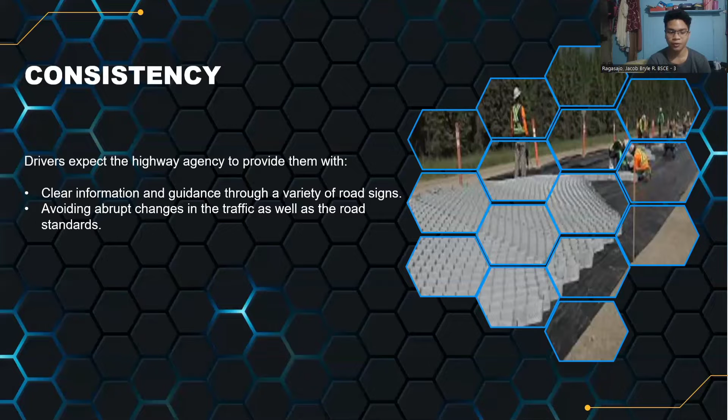AASHTO, or the American Association of State Highway and Transportation Officials. In 1914, the American Association of State Highway Officials, or AASHO, was established as an association of state, territorial, and District of Columbia Highway Departments and the Federal Highway Administration.

The name was expanded in 1973 when the Department of Transportation was integrated into the association, renaming AASHO to AASHTO, giving the officials of this agency the power to govern its operation.

Engineering activities were implemented by standing committees with the task of preparing specifications, manuals, and standards representing current highway engineering practice. AASHTO publications include transportation materials specifications and tests, specifications for highway bridges, geometric design standards, and numerous policy statements and guides.

AASHTO publications are authoritative, meaning they are reliable. So all the information that AASHTO publishes is accurate or true. References are made in these books and periodic manuals. The association also publishes AASHTO quarterly reports on current highway and transportation subjects, including trends, forecasts, and legislation.

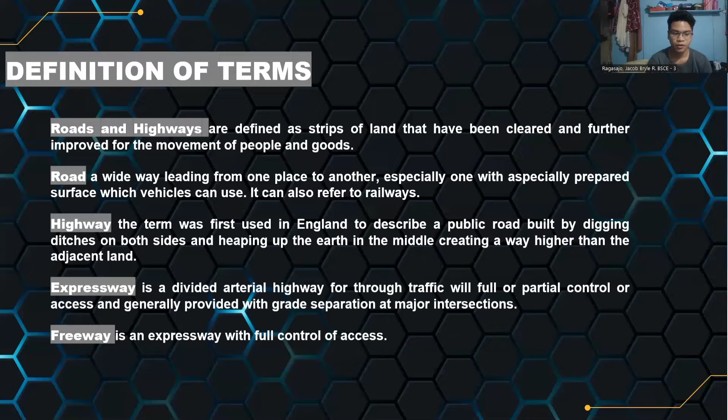Expressway is a divided arterial highway for through traffic with full or partial control of access, and is generally provided with grade separation at major intersections. Freeway is an expressway with full control of access.

Control of access is a condition where the rights of owners or occupants of adjoining land, or other persons' access to light, air, or view in connection with the highway, are fully or partially controlled by public authority. A controlled access highway is a highway designed to allow traffic to safely travel at a fast speed.

There are two types of control of access: full and partial. Both have the authority to control access and give preference to through traffic by providing access connections to selected public roads. The only difference is that crossing at grade or direct private driveway connection is not permitted in full control of access, while in partial control of access, crossing at grade and private driveway connections are allowed.

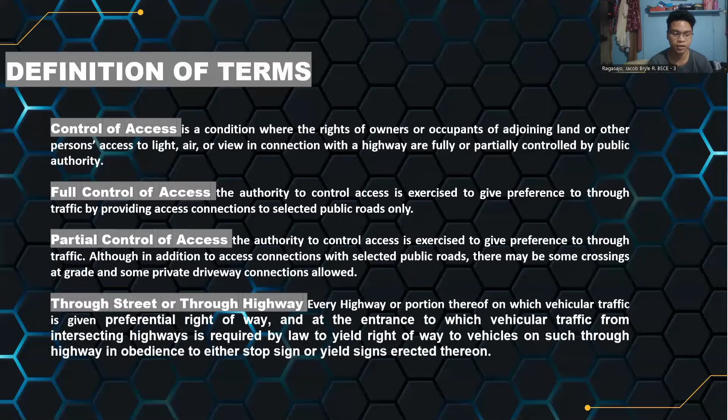Through street or through highway: every highway or portion thereof in which vehicular traffic is given preferential right of way, and at entrances to which vehicular traffic from intersecting highways is required by law to yield right of way to vehicles on such through highway, in obedience to either a stop sign or yield sign erected thereon.

Parkway is an arterial highway for non-commercial traffic. So it is a wide road, usually divided, with an area of grass and trees on both sides and in the middle.

Arterial street is an arterial route that carries traffic to the nearest access point or through traffic. It often serves as the most advantageous route for relatively long distance travel. So it is a road without controlled access that can carry a large volume of local traffic at a generally high speed, being below controlled access highways in the hierarchy.

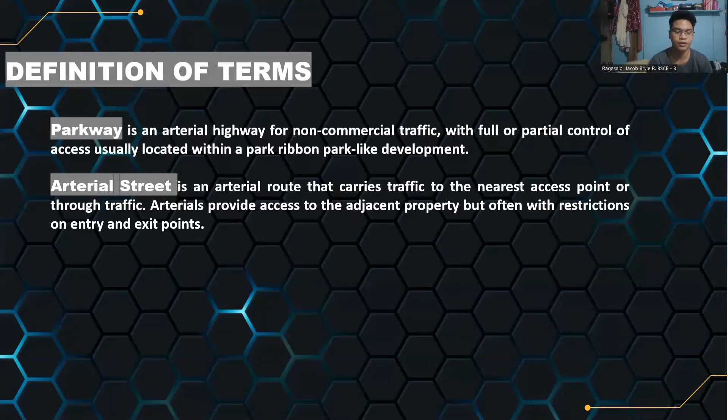These are the basic considerations in planning arterial roadways: selection of routes, studies of traffic volume, origin and destination, accident experience. Width should not be less than 15 meters, must carry at least one lane of traffic in each direction, should be at least 1 kilometer in length, and should skirt neighborhood areas rather than penetrate them.

On grid design system streets, arterials are spaced about 600 to 900 meters apart, and where accident hazard is not a factor, the minimum volume to justify an arterial road is 300 vehicles per average hour during the day and 450 vehicles hourly during peak periods. Sometimes peak period volume on a designated arterial road exceeds the capacity of a two-way street.

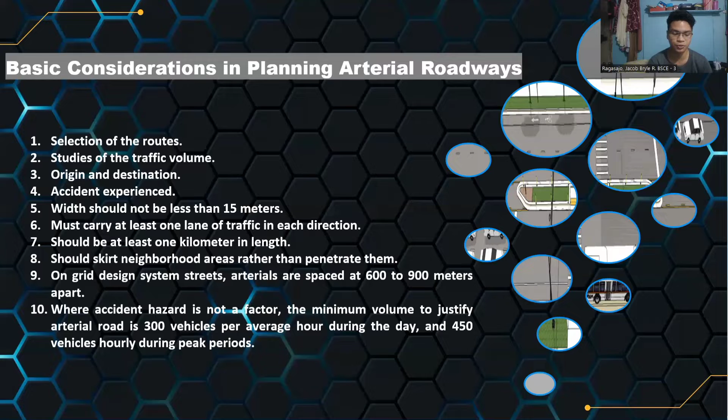To increase arterial capacity, the following solutions are enforced: during peak hours, parking is prohibited on one or both sides of the streets; parking is prohibited several meters away from each side of road intersections or corners; right turn is allowed on red signals anytime with care; left turns are eliminated at congested intersections; and the direction of traffic is reversed in a center lane to provide more lanes in the direction of heavier traffic flow.

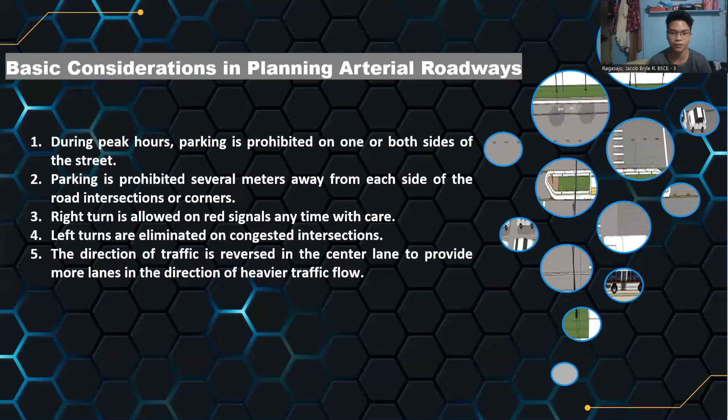Collector streets form a smaller mesh grid pattern where passengers are picked up from service streets and carried to the arterials. So it's more like connected to the arterial roads, or a street leading to arterial roads.

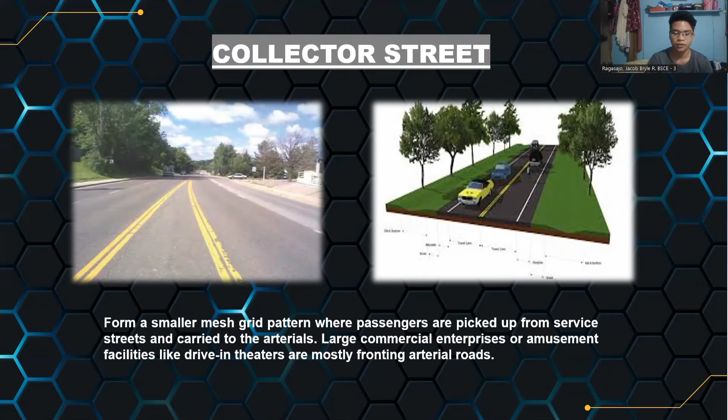Local road is defined as a street or road primarily for access to residents, business, or other adjoining properties. It is also defined as a road constructed and maintained by a local government, and it refers to streets or roads that accept traffic from collector roads or streets.

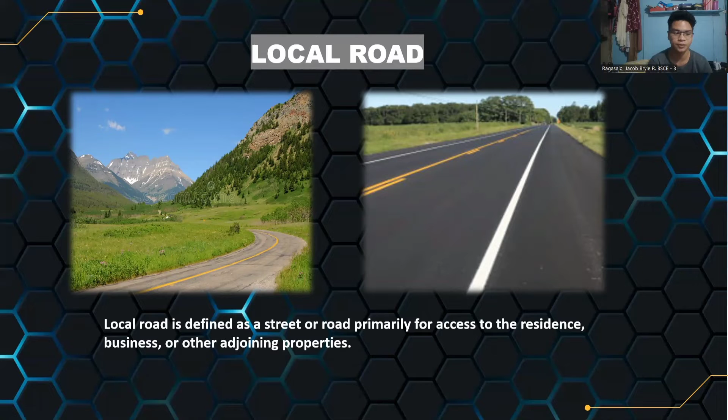Highway capacity is defined as the maximum number of vehicles that are reasonably expected to pass a given point over a given period of time, usually expressed as vehicles per hour. Under ideal conditions, one freeway lane can accommodate about 2,000 passenger cars per hour, and a two-lane road can carry up to 1,000 passenger cars per hour in each direction.

There is an obvious relationship between vehicle speed and highway capacity. As the volume of traffic approaches capacity, the average speed is markedly reduced.

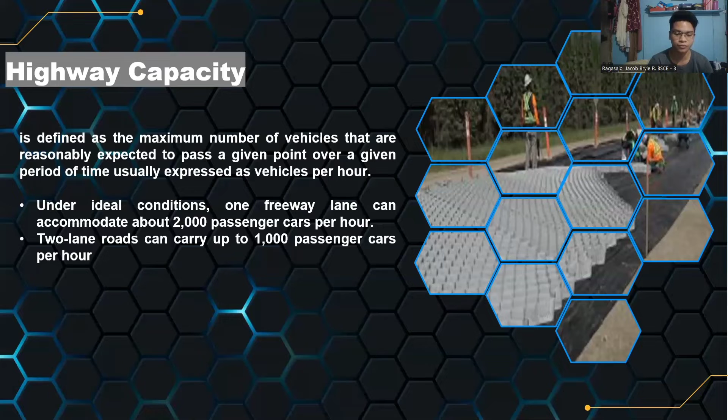Average annual daily traffic, or AADT, refers to the traffic volume or flow on the highway as measured by the number of vehicles passing a partial station during a given interval of time. It is also called average daily traffic if the period is less than one year. Volume may be stated as hourly observed traffic or estimated 30th-hour volume, commonly used for design purposes.

This is determined by counting the total number of vehicles crossing a point in both directions on a highway during a year, and dividing this value by the number of days in a year, so it's divided by 365 days.

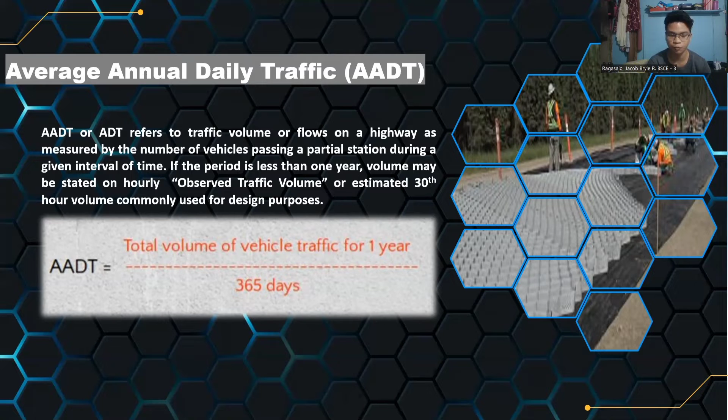Next is design speed. There is no single set of geometric standards that will apply to all highways. For every highway segment, decisions regarding appropriate controls for each of the many details or requirements must be addressed individually or separately.

AASHTO defined design speed as the speed determined for design and correlation of the physical features of a highway that influence the vehicle's operation. It is the maximum speed that can be maintained over a specific section of the highway when weather and traffic conditions are so favorable that the design features of the highway govern.

Basic design features refer to the tightness and super elevation of curves, the sight distance, and the grade. The design speed is basically higher than the anticipated average speed, and AASHTO recommended that the design speed be set to the greatest degree possible to satisfy the needs of nearly all drivers, both today and throughout the road's anticipated life.

For economic reasons, the geometric features of certain road sections are designed for speeds from 30 to 50 kilometers per hour. Selection of the proper road design speed is one of the most important decisions to make because it sets the limit to curvature, sight distance, and other geometric features.

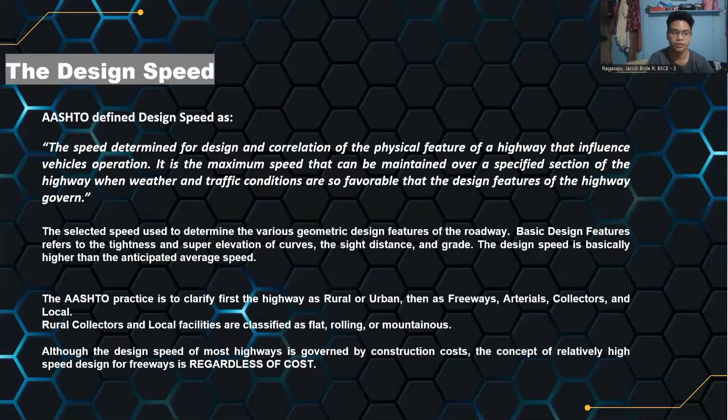AASHTO's practice is to classify the highway first as rural or urban, and then as freeways, arterial, collectors, and local.

Rural collectors and local facilities are classified as flat, rolling, or mountainous, although the design speed presently used is 80 kilometers per hour. Highway designers project design speeds up to 120 kilometers per hour to guarantee against future obsolescence, as well as to increase the margin of operating safety.

High-speed road design must anticipate future generations of high-speed vehicles and advanced transportation systems that may operate on many of these road alignments. Although the design speed of most highways is governed by construction costs, the concept of a relatively high design speed for freeways is applied regardless of cost, since they are planned for national high-volume traffic and high-speed networks.

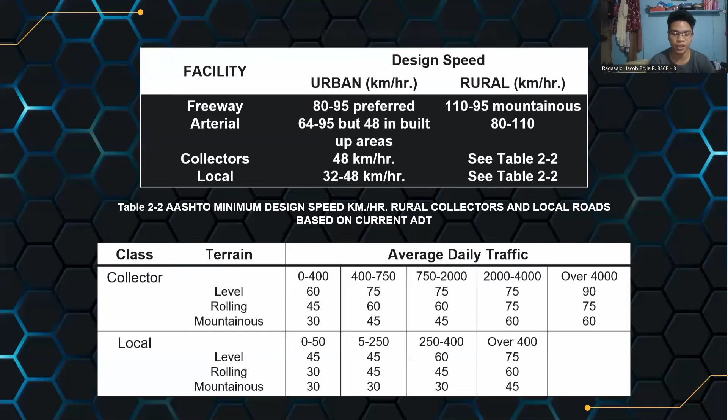Next is the cross-section of a typical highway. The cross-section of a typical highway has a latitude of variables to consider, such as the volume of traffic, character of the traffic, speed of the traffic, and characteristics of motor vehicles and of the driver.

Highway design usually adopts a cross-section that is uniform in thickness from end to end of the improvement. This is acceptable on high-volume traffic road facilities, but for low-volume traffic facilities, modifications of features like shoulder width in rough areas are usually employed to reduce cost.

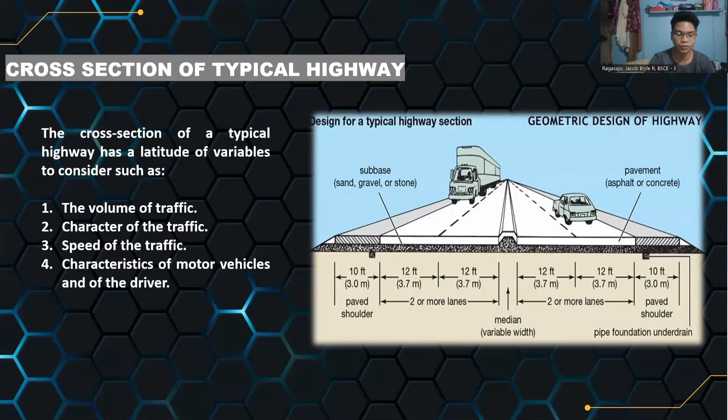A cross-sectional design generally offers the expected level of service for safety. Recent studies showed that a 7.20-meter wide pavement has 18% less accidents compared with a pavement narrower than 5.50 meters wide.

A 7.20 meters wide pavement has 4% fewer accidents than a 6 meters wide paved roadway. Accident records show no difference between 6.60 meters and 7.20 meters wide pavement.

For 6 meters, 6.60 meters, and 7.20 meters wide pavement with 2.70 to 3 meters wide shoulder, recorded accidents decrease by 30% compared to 0 to 0.60 meters wide shoulder and 20% compared with 0.90 to 1.20 meters wide shoulder. It appears that the above difference in accident potential may not justify higher standards, particularly when traffic volume is low.

Originally, the total surface width of the roadway was only 4.50 meters, but due to the increased number of vehicles using the roadway, the width was adjusted to 4.80 to 5.40 meters. So from 4.50 meters, adjusted to 4.80 to 5.40 meters.

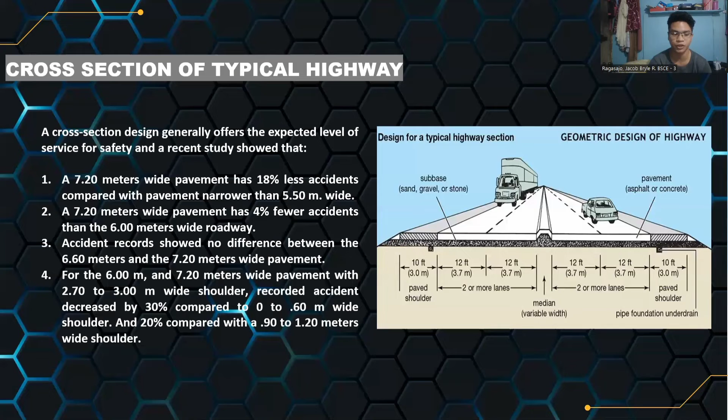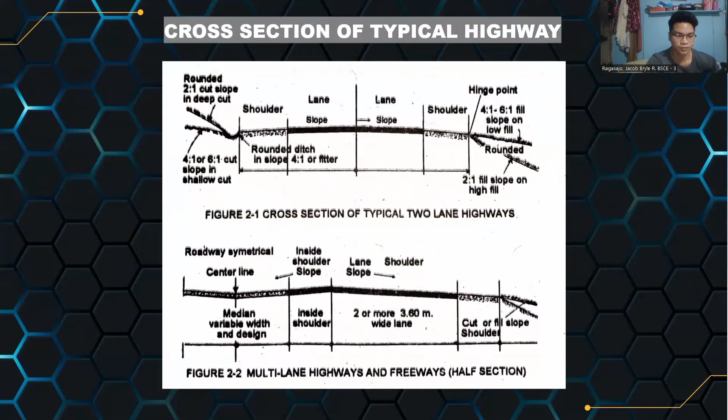For two-lane rural highways, a 7.20 meters wide surface is required for safety clearance between commercial vehicles and recommended for main highways. So in the cross-section of a typical two-way lane highway, a 7.20 meters wide surface is required for safe clearance. For collector roadway, a 6 meters wide surface is acceptable only for low volume traffic, including few trucks traveling thereon.

For local rural roadway, the minimum surface width is 4.80 meters for a 30 km per hour design speed. For urban roadway, the minimum design width is 3.60 meters, although 3 meters is also allowed where space is limited.

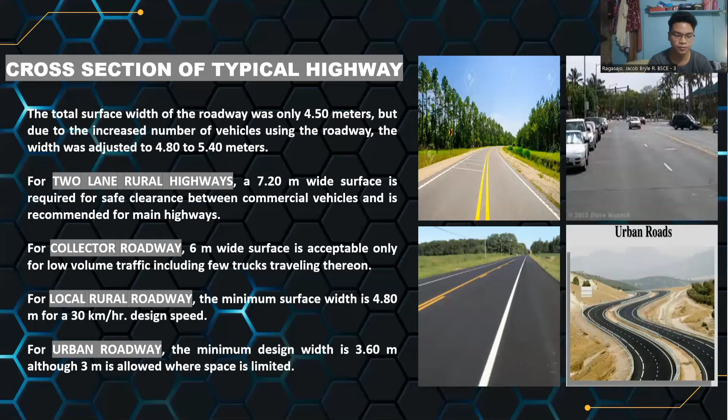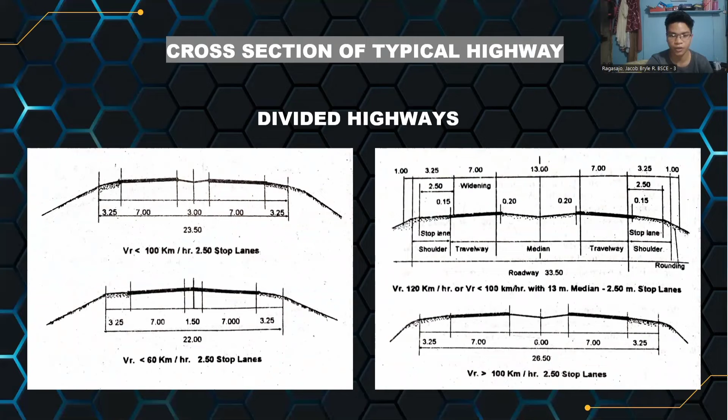These are the cross-sections of divided highways where the design speed is less than 100 kilometers per hour. And this is the undivided highway for design speeds less than 60 kilometers per hour, 80 kilometers per hour, and 100 kilometers per hour.

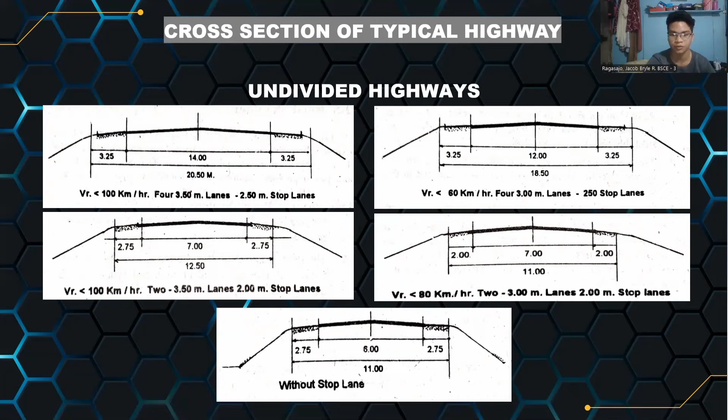Next is the road shoulder. Road shoulder or verge is defined as that portion of the roadway between the edge of the traffic lane and the edge of the ditch, gutter, curb, or side slopes.

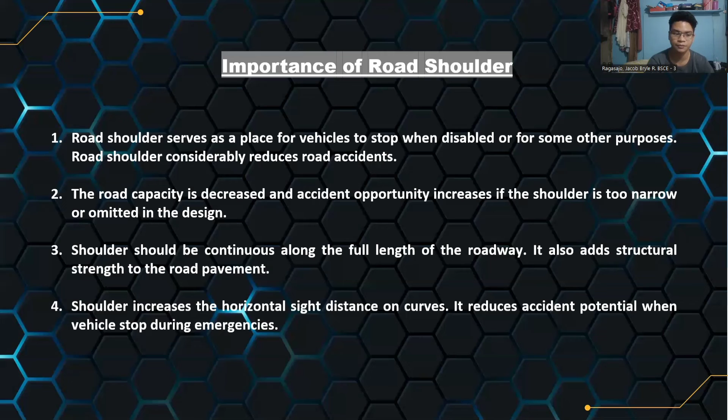The policies on geometric design recommend that outside shoulders should be paved for at least 3 or 3.60 meters wide if truck volume is more than 250 in the design hour or ADT. The recommended width of left shoulder is 1.20 to 2.40 meters, with at least 1.20 meters paved.

If there are at least 6 or more lanes, the median shoulder should be 3 meters wide, or 3.60 meters if truck volume in the design hour exceeds 250.

For arterials with ADT less than 400, the usable shoulder width is fixed at 1.20 meters minimum, although 2.40 meters wide is much preferred. When the design hour volume ADT exceeds 400, the usable minimum shoulder width is 2.40 meters, although 3.60 meters is also recommended.

For urban arterial roadway, a similar shoulder without curb is suggested unless needed for drainage purposes. The width of the median shoulder on 4-lane divided arterials is fixed at 90 centimeters as minimum. For 6 or more lanes, a 2.40 to 3 meter shoulder width is recommended.

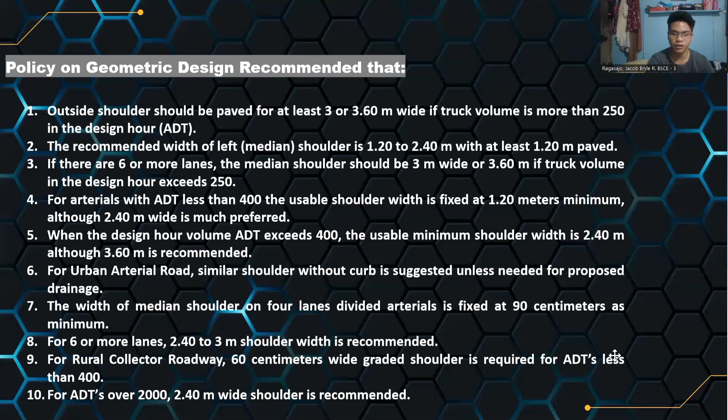For rural collector roadway, a 60 centimeters wide graded shoulder is required for ADTs less than 400, and for ADTs over 2,000, a 2.40 meters wide shoulder is also recommended.

In this figure, we show the shoulder design or shoulder details. This is a straight line alignment, shoulder detail with stop lane.

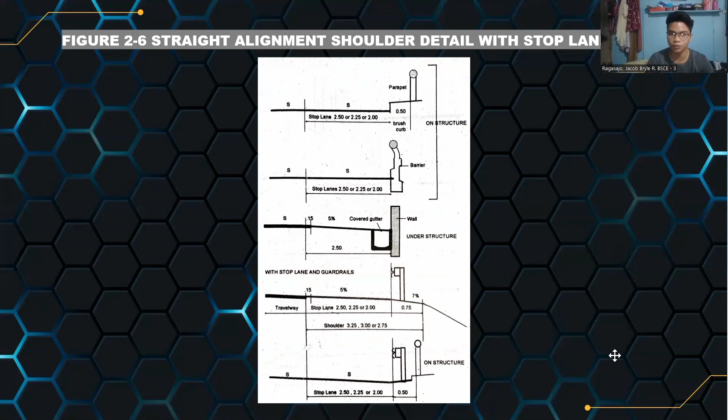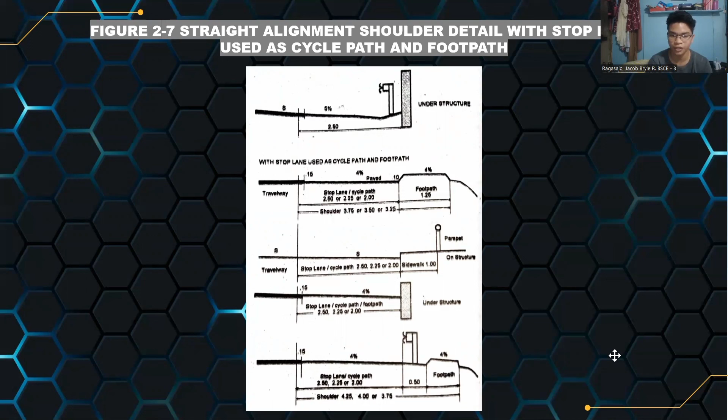In this figure, the straight line alignment shoulder detail with stop lane is used as a cycle path or footpath, meaning the shoulder detail has a sideline or sidewalk.

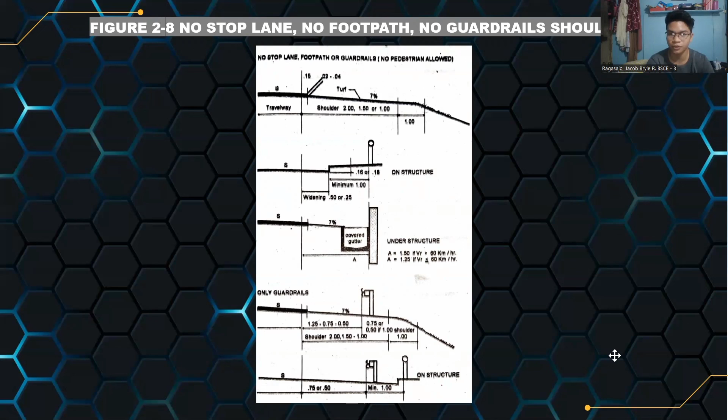So the next topic is the cross slope, which will be discussed by the next reporter.